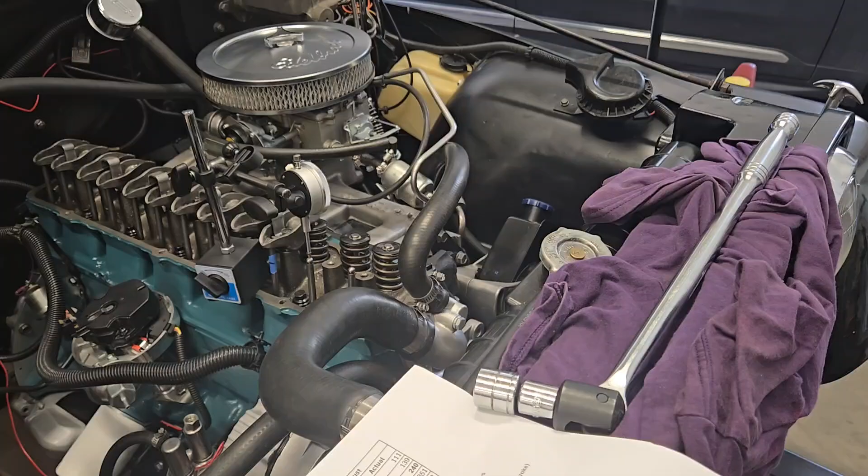So here's a quick overview of this setup that I have. I have my dial indicator on the intake push rod. I was talking about that. You could either measure it here. I find with the tip of the dial indicator being right at that push rod, I don't have to worry about the ratio of the rockers. Again, that's 1.6, so I can just measure it directly from the cam lobe. I just have a pretty simple setup there. That was pretty easy to do.

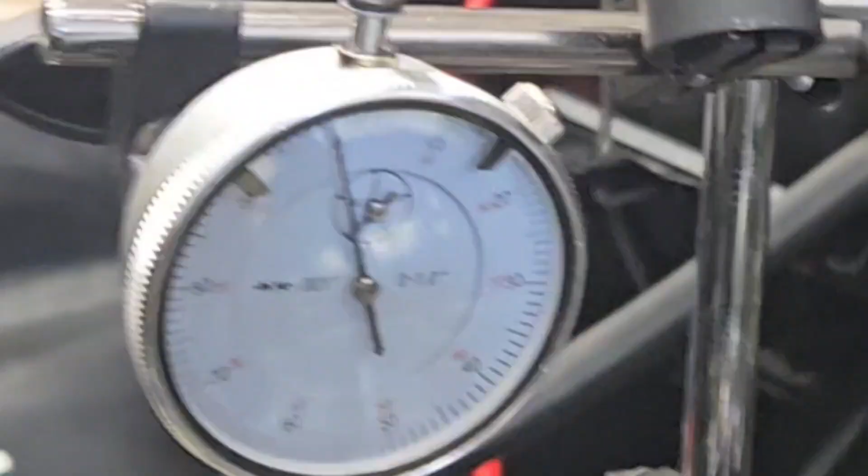Around here you can kind of see that I have it zeroed out. So that's the intake, and I'll do the exhaust next.

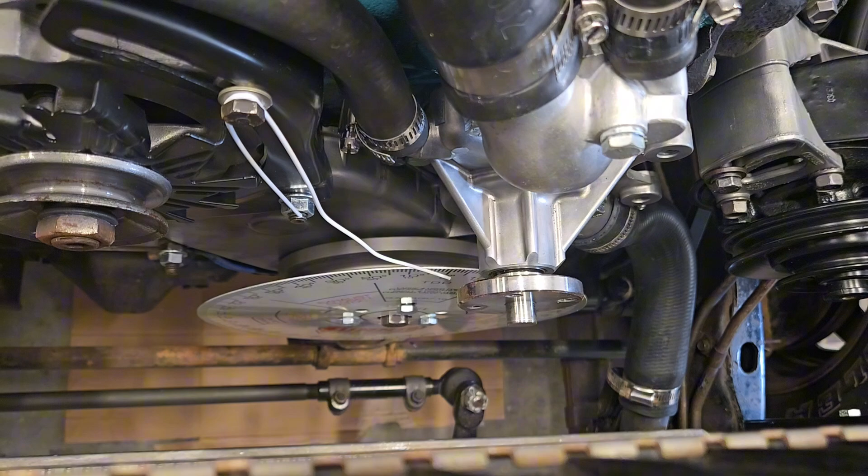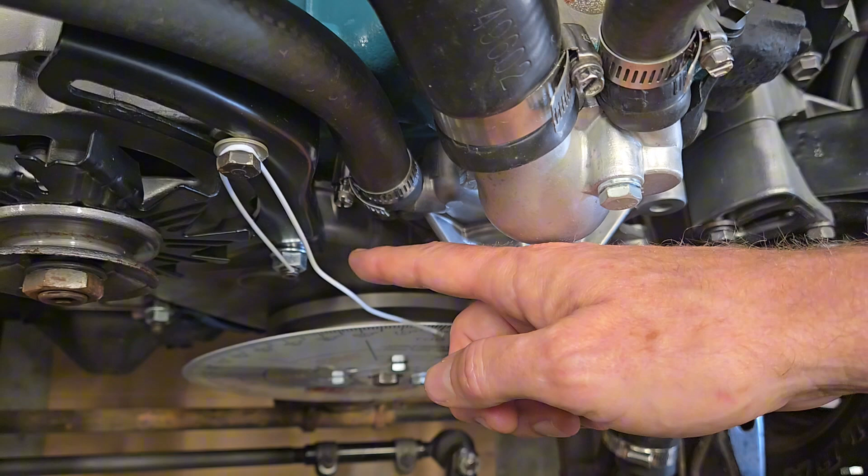Now here's the other part. I'm going to try to get as good an angle as I can. I put the Summit dial on there, again, there's probably lots of different dials you can buy, but I just bought this Summit one, I think it was like 23 bucks. It didn't come with a solid lifter and all that other stuff, it was just the dial. My hanger, and that's my pointer.

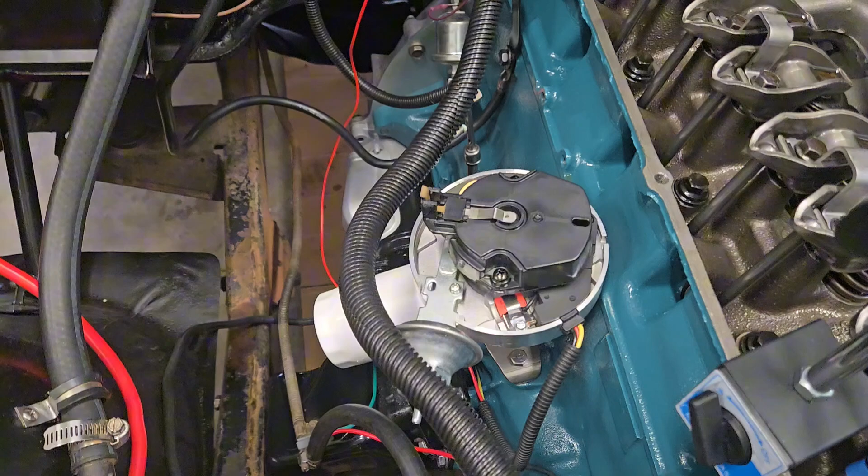I actually do have it at 0 right now, so I already put it at top dead center. And I know it's on the compression stroke because I also have my distributor cap off, and I know that's at the top of the compression stroke, between the compression and the power stroke.

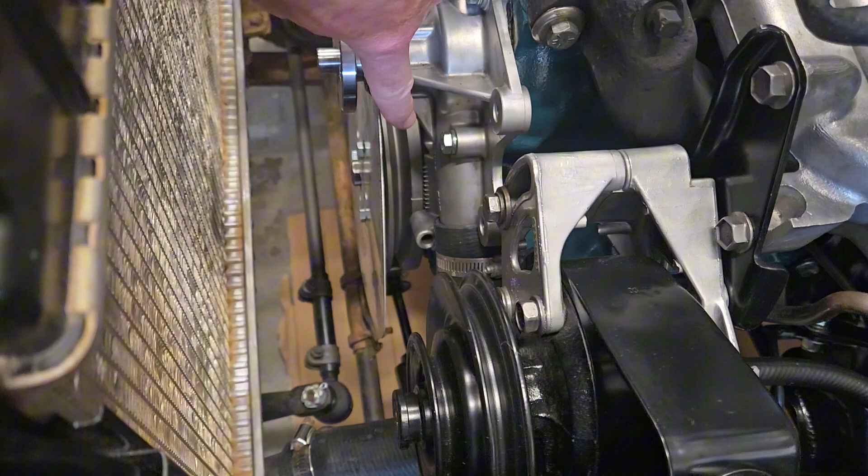So let me see if I can get a good shot of this. You can see my timing mark there. Right there, I'll try to get a little bit closer, but you can see the timing mark, and that actually is at 0, so I know this is at top dead center. I've already used a piston stop to confirm that my balancer is not spun and that it's right on there. It's the second mark, it just looks like it's off because it's off an angle.

But let me see if I can get a... So if you look at that right there, again, the correct angle would be about here, and that is right at that second mark. I can see it better from my position, but that is at 0. And so I put my marker.

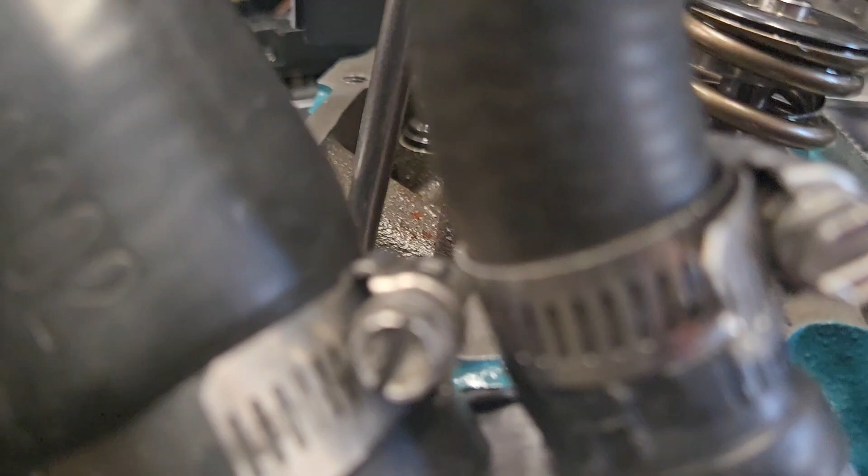Again, I just have a coat hanger right here. Again, it's a tight spot, but see, it's right at 0. So I just have that tip of it pointing right at 0.

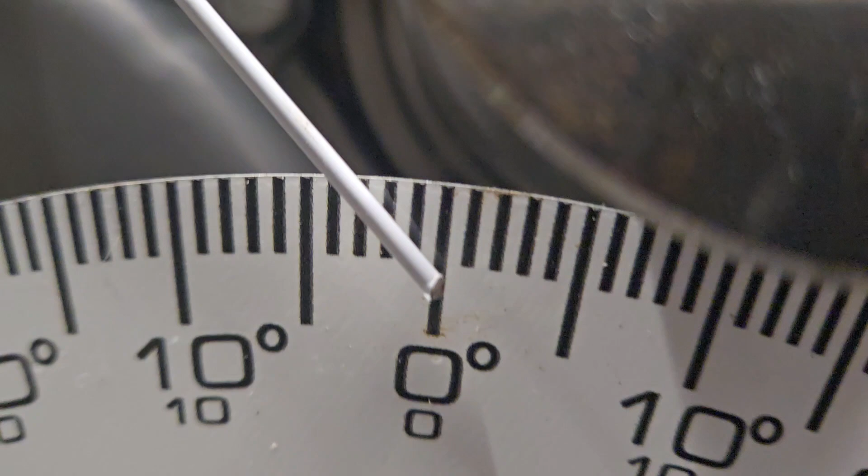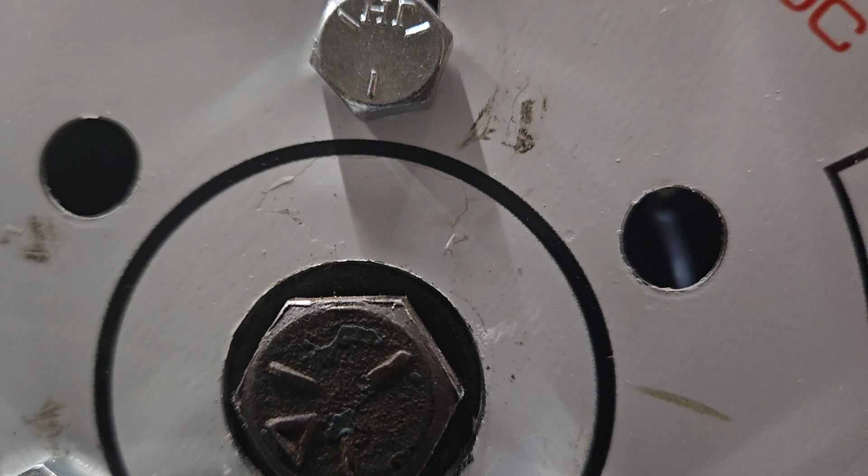And I'm going to show the bolts down here. Again, this is how I have the bolts. I just used the 3 bolts that the pulley connects into the harmonic balancer. There were already 3 holes in the timing wheel, so I'm just using those, and it fit right over there. It's centered nicely. And also a bonus from that is I did not have to pull out the main bolt for the crankshaft that holds on the harmonic balancer, because you do have to push that counterclockwise, and I didn't want it to...

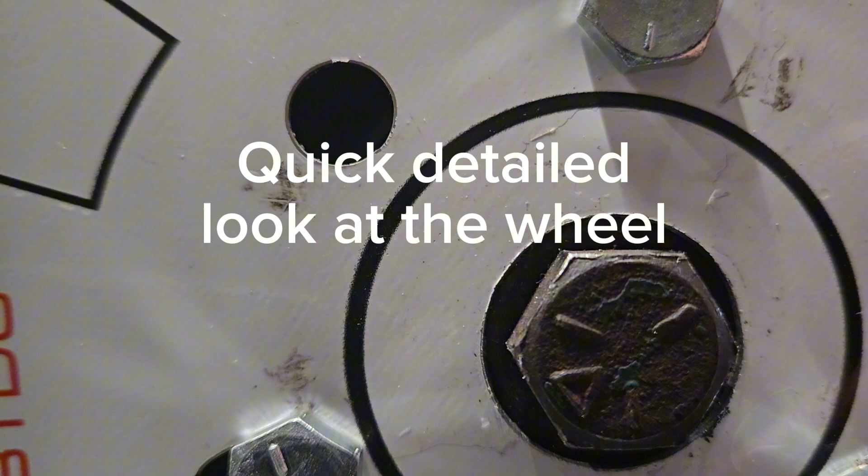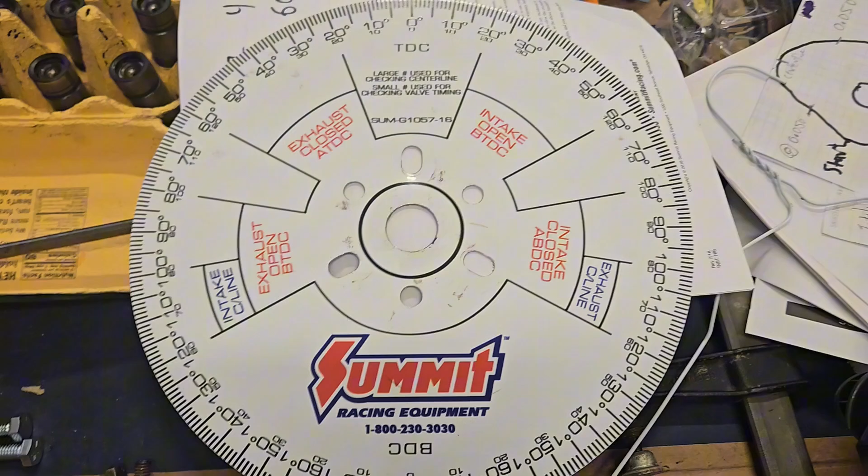Wanted to get a closer look at the Summit wheel because I had already installed it when I started the video. So there's the wheel. Again, I was just measuring the degrees around there. It's a little bit of a pain because it goes to only 180, and I was trying to measure both sides, but not too much math there. It does try to help you out with some of the intake and exhaust relative ranges.

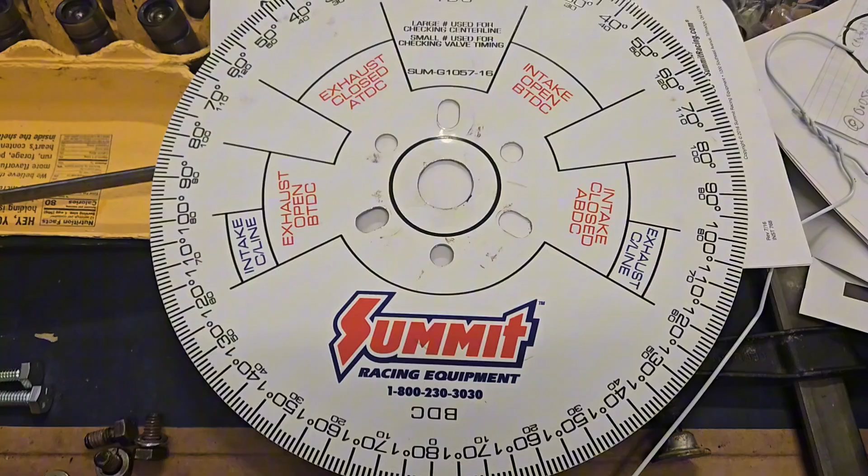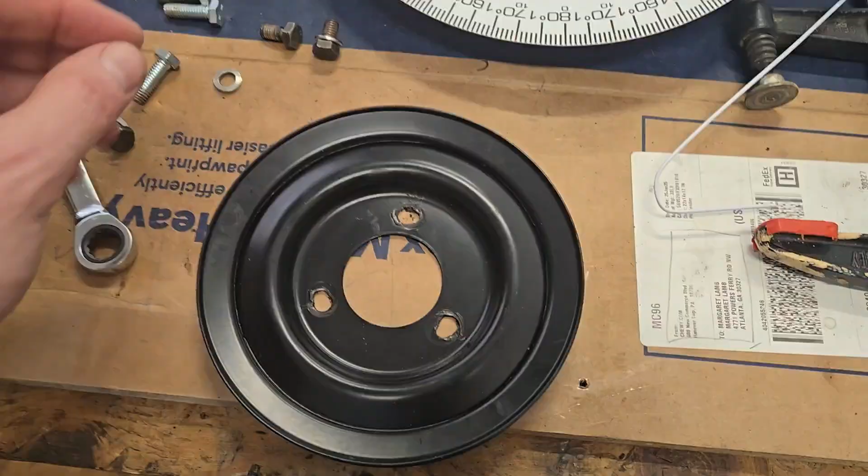So this is the pulley that goes over the harmonic balancer, and again, the bolt for the crankshaft goes right there. These bolts here hook the pulley to the balancer. I used just 1 inch because it's not a flat surface, our harmonic balancer is not a flat surface to connect to. Had to screw them in just the right amount to keep this relatively flat.

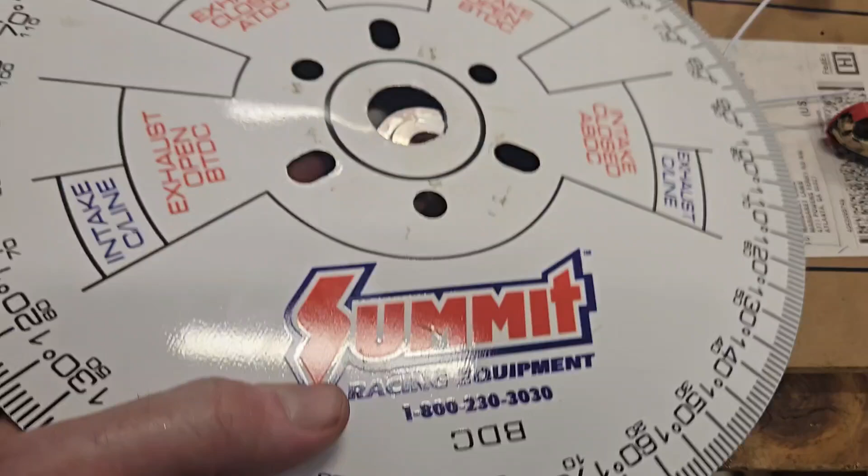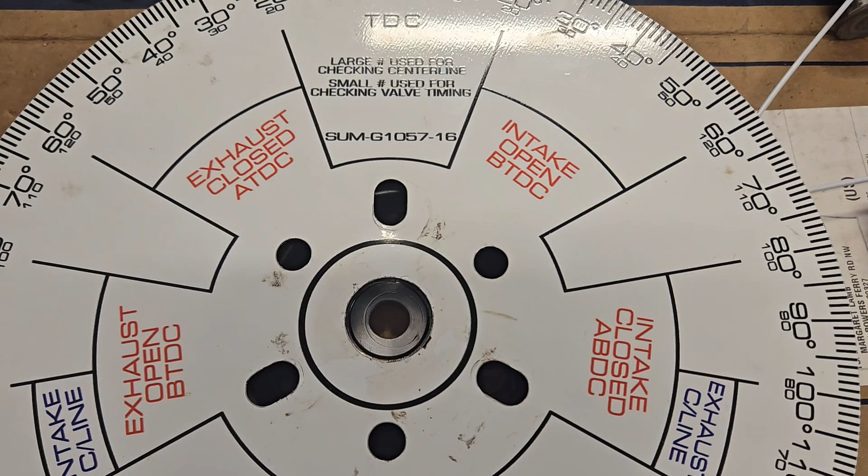So it actually does come with these inserts depending on the size of the bolt that goes into your crankshaft. So you can kind of see it goes like that, and that way you can put the crankshaft bolt over it. But again, I just thought this was much easier, because when that is over it, it sits a little bit proud and the wheel here would spin. And so anyway, this was just much easier. I didn't have to undo that bolt at all, I could have it torqued down, and it worked out pretty well.

And it just missed the water pump, so you don't have to take the water pump off, nothing else, just the front fan and the pulley, and you're good to go.

So from the vantage point up here, I can make out pretty well within a degree of where that tip is going to be. So I'll read out what I'm saying down there as I take a look at the dial gauge. You're just going to have to trust me on that one.

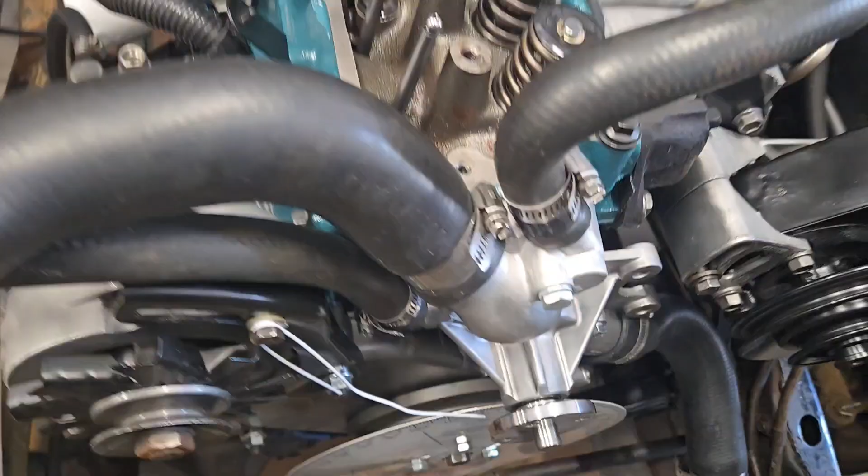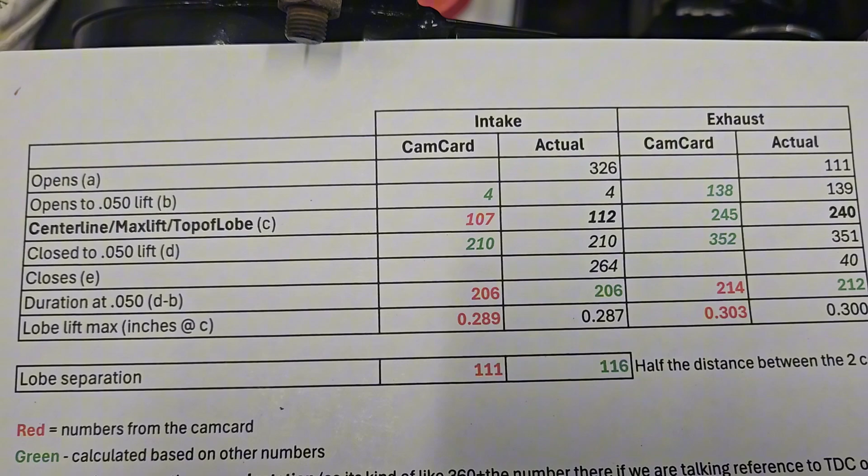Highly recommend taking out the spark plugs because it's much harder to turn with the spark plugs in there, because of the compression. Again, what I showed in part 1 was all these numbers here, and I need to confirm this 112. Again, I was pretty shoddy with it.

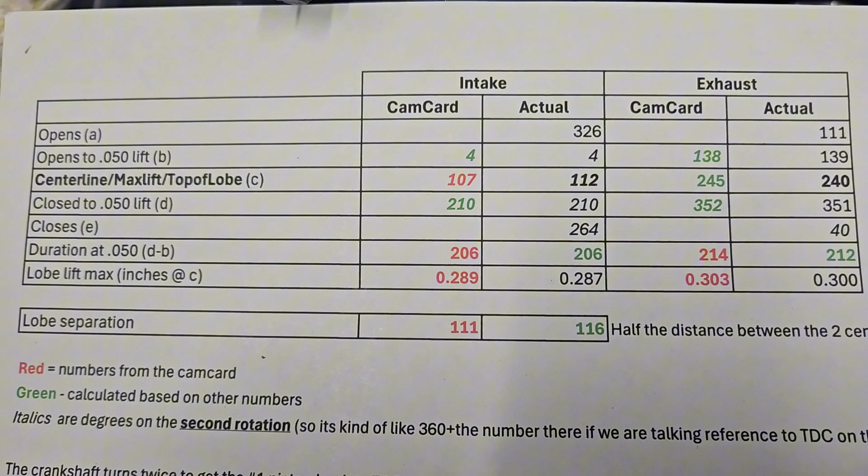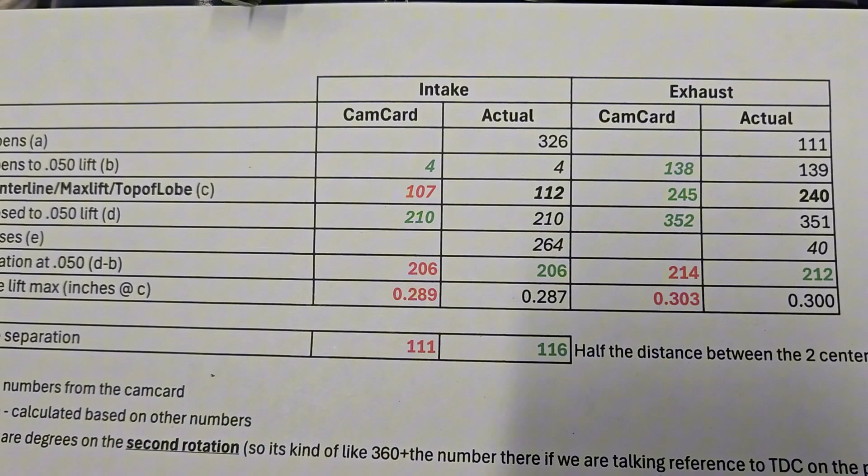I did the actual measurements for the intake and exhaust without even looking at the cam card. I just wanted to go through real quickly, and I was amazingly surprised at how close I got to what the cam card said. Again, in part 1, I go through all those numbers and where those come from. But I'm 5 degrees off here.

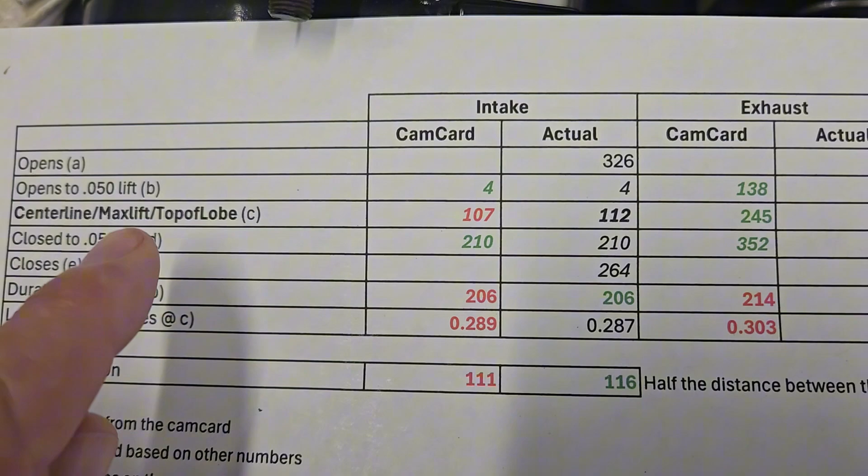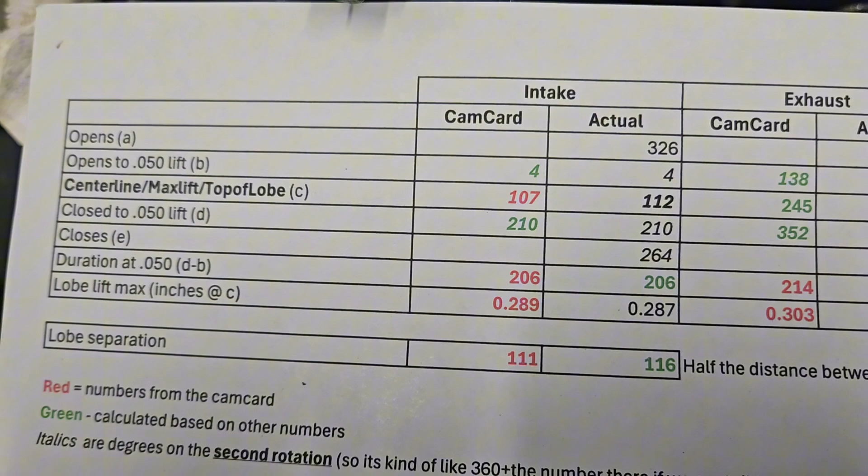My guess is that top of the lobe, that's the intake center line, is supposed to be 107. I got 112. It's flat there, almost flat for a little bit, and you'll see it. I'm going to move it back and forth and try to be a little more precise with the dial indicator. I just saw it, it kind of stopped going up.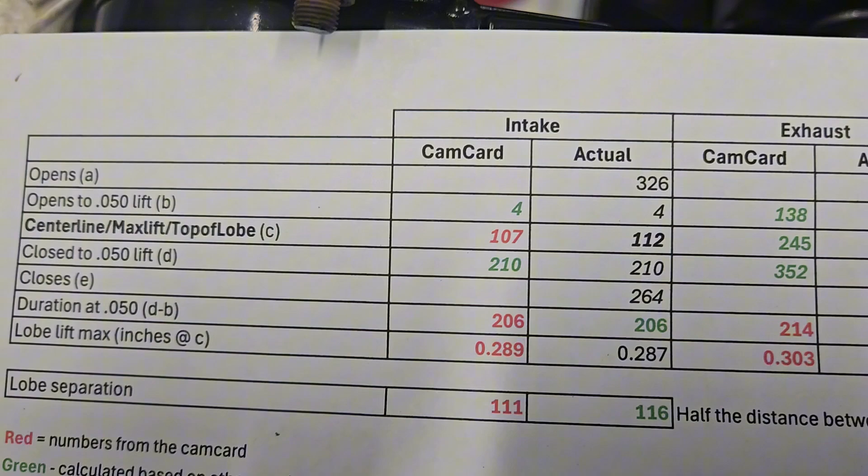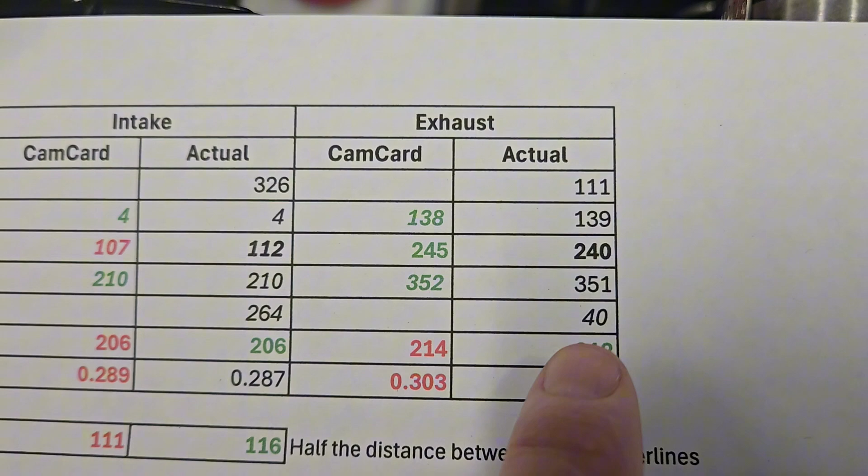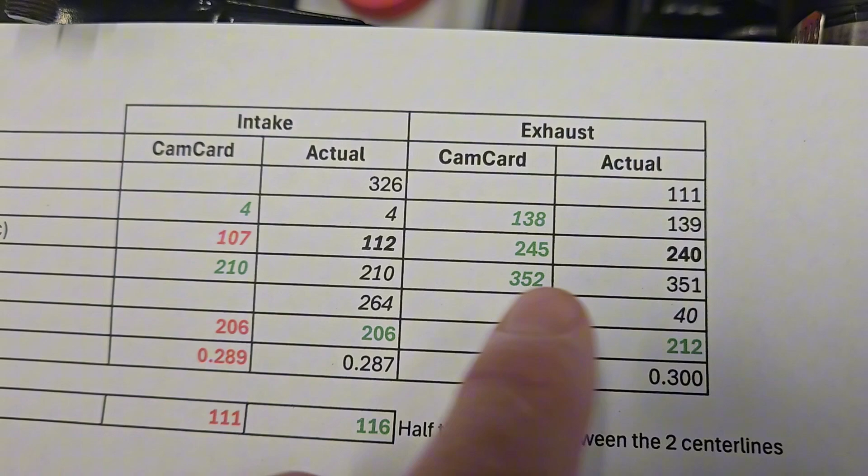It started going down, so I just measured the degrees at that point. My guess is it actually is 107, and I just need to confirm that, because that 4 and that 210 that I measured independently were spot on. So I think the 112 is just off. And then the same here, 139 within 1 degree, 351 within 1 degree. I think that 240 was just a little slop on my part. So I'm going to reconfirm that it's actually closer to 245. I mean, everything is close enough that I know the camshaft was ground pretty darn closely to the camshaft specs. And that's really what we're trying to do here.

So hopefully that's a pretty good angle. You can see I already got it zeroed out. I have it at top dead center, so I know that the exhaust and the intake valves are closed, or I'm off the lobe. So I know that for a fact. And I'm at 0 on the dial. So I'm going to go ahead and turn this.

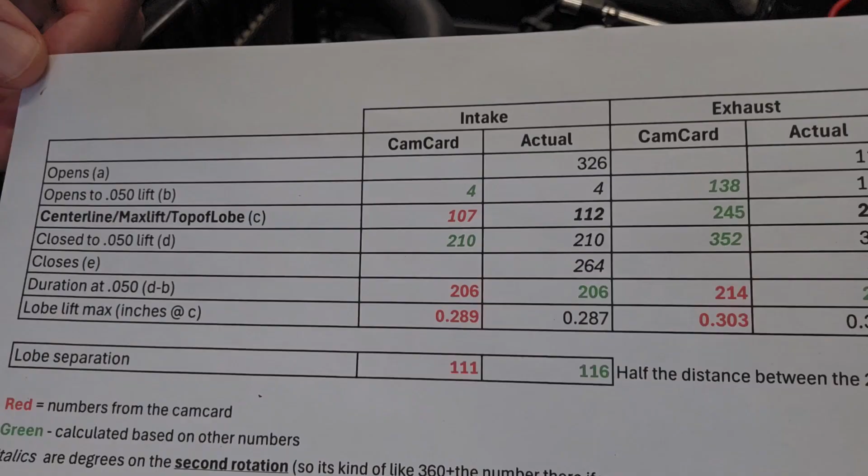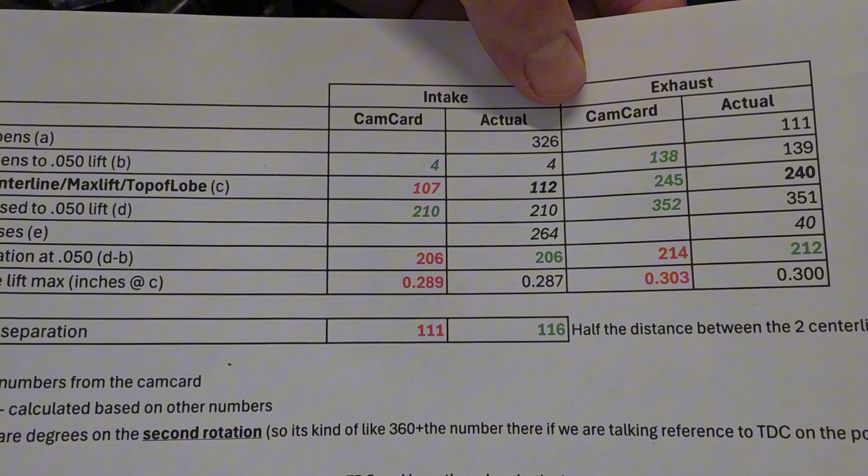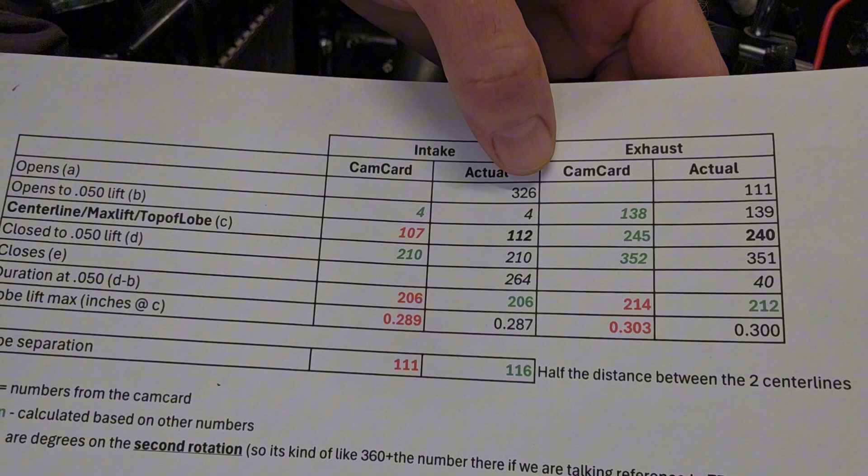Now in the intake, the 107 is at the top, and that's what I'm trying to confirm. Again, this is a full rotation all the way around, so I'm going to spin it a whole 360 degrees, and actually I should start seeing it open at 326. So that's not given by the cam card, but I know from my previous measurements that it starts to open at 326, and then at a full revolution plus 4 degrees, I'm going to be at 50 thousandths of lift, and then I'll go to that max part.

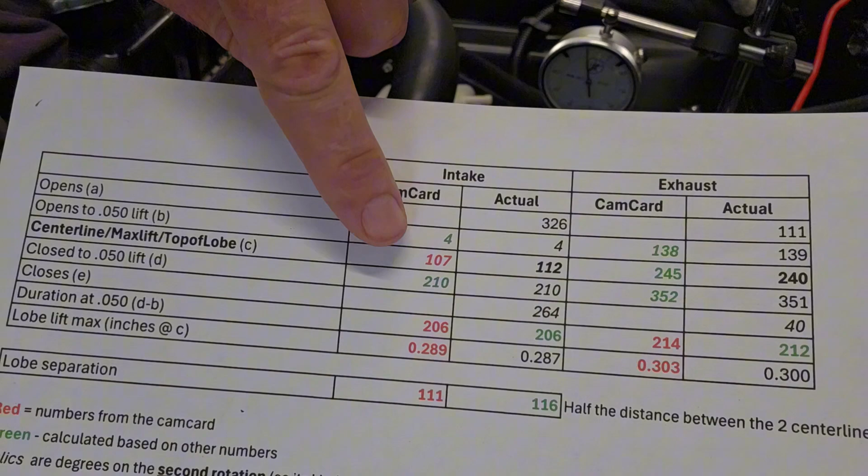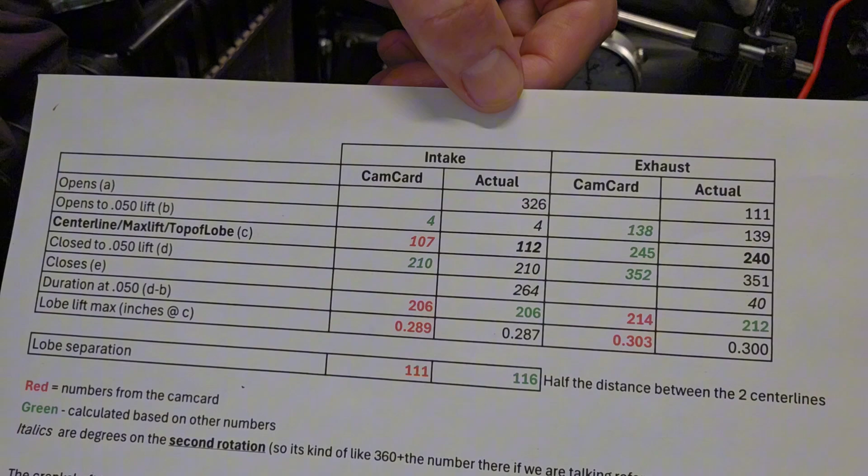Once I get to 100 degrees or there, I'll slow down quite a bit and really try to dial that in and just make sure that it's 107 and not 112. I'm pretty sure it is, but I'm just going to use this for illustration purposes. So we're going to go to 326 degrees to see the intake start to move. It's whenever this thing starts to move, when the dial starts to move up, that is at 326.

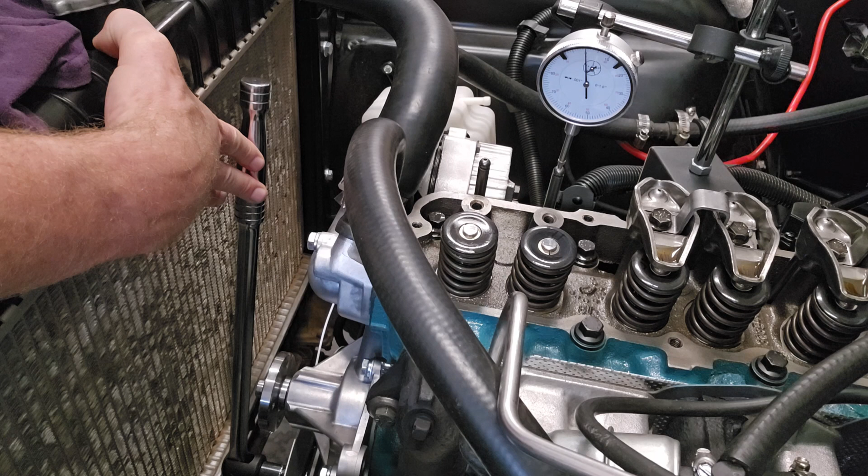I'm seeing it starting to move there. All right, where are we? Just to confirm that 326. So I think I went past it. Again, I kind of get why they do the measurements at 50 thousandths, because exactly where it starts, just from the grinding, I can see there's probably a lot more inaccuracy with that number, because it's really hard to see if that needle has even moved.

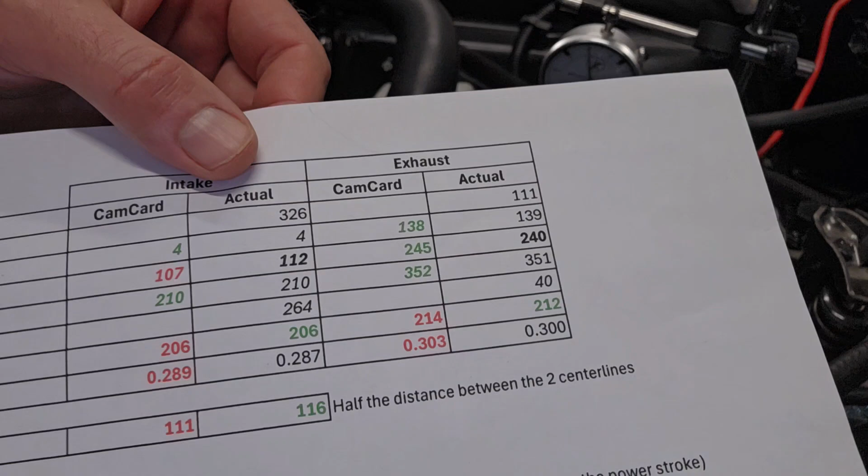I'm in the neighborhood of that 326 that I had measured before, so I'm just going to leave that as is. Again, that doesn't play as much into it. Okay, so I'm going to keep turning. So that 326, again, I'm going to do a quick look at this. That 326, I was almost a full rotation around, that's what I was measuring.

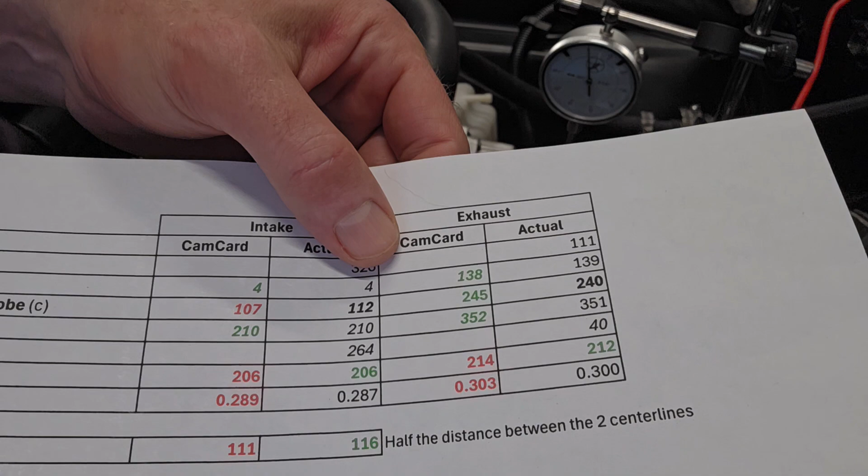Now I know that once I go past 0, I'm going to go about 4 degrees past, and that should be right at 50 thousandths lift. So that's what we're going to take a look at here. We're going to see the dial indicator going up. We're looking for the exact degrees at 50. I'm just slowly turning.

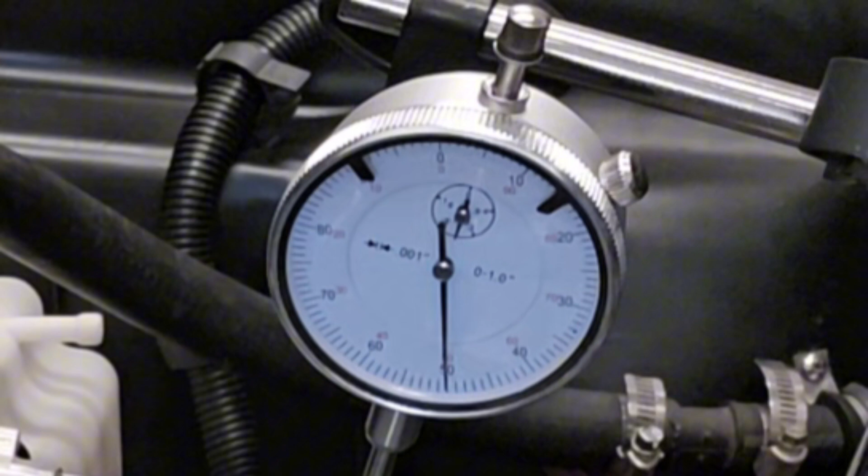Right, that's spot on at 50, and I'm at 4 degrees. So that 4 number is correct. And I had mentioned this before, that 4 degrees is spot on from the cam card. So I know that I am dot to dot. So just going through that first step at 50 thousandths using the cam card or whatever is stock for your engine, you can make sure that your cam has not skipped a tooth.

So that's one way to do that without having to take off your timing cover. Again, that's a big mess. So that is a way to confirm that you have not skipped a tooth. Of course, if you have a really loose timing chain, it may be off some, but I wouldn't think it'd be off as much as a skipped tooth if it's just a little loose.

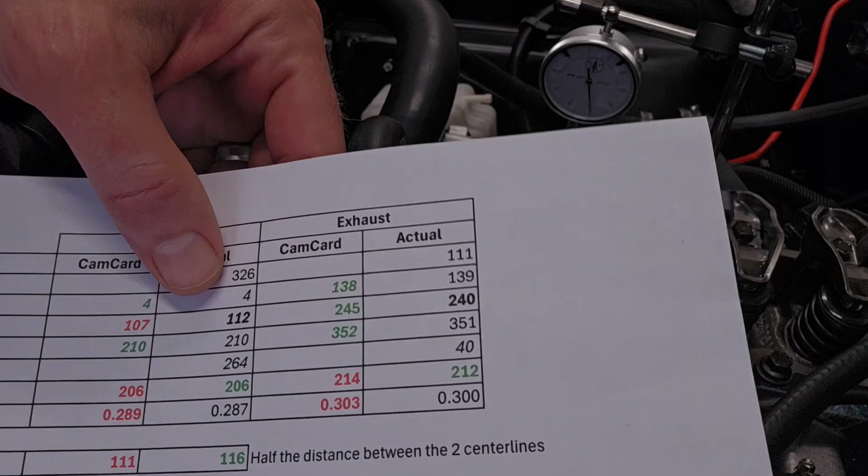All right, so that's 50 thousandths, and really what we're trying to confirm is that 107 mark. So I'm going to go another 103 degrees. We're going to see what happens here. We're going to try to get that perfect center line, top of the lobe.

And we'll be hitting that at about 287 thousandths of an inch, where the top of the lobe is. So we can take a look at the gauge here and kind of follow that around. Right now it's at 50, 100, 200, 270. I know that 289 is what it is.

So we're going to take a look at that and see, is it still going up? Yeah, it's hard to measure. Okay, it's still going up. We're at 280 almost. Still going up, still going up. We should start seeing it slow down here pretty soon.

All right, I've stopped turning it. What are we at? 285, 285 and a half. Still going up, still going up. All right, I've stopped. Let's see. 287. 287 and change.

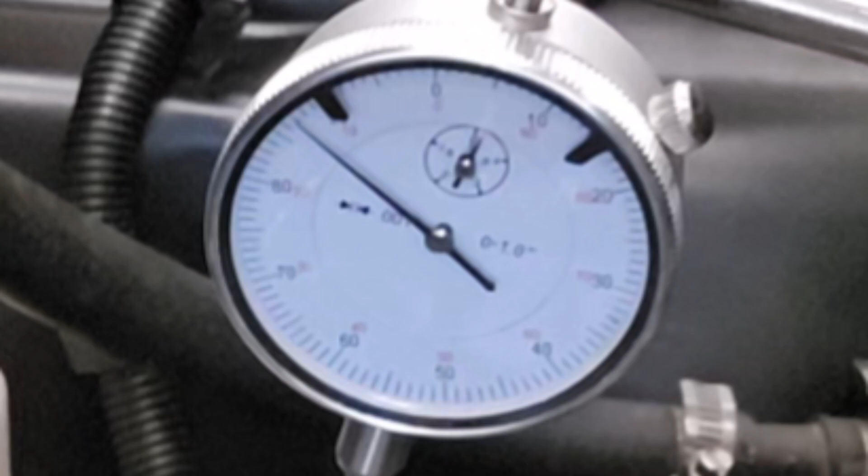So if you are doing this, that center line, you basically need to find where it stops going up and where it starts going down. That'll be about a 10 degree difference. In the middle of that will be the actual center line. So that is good to know.

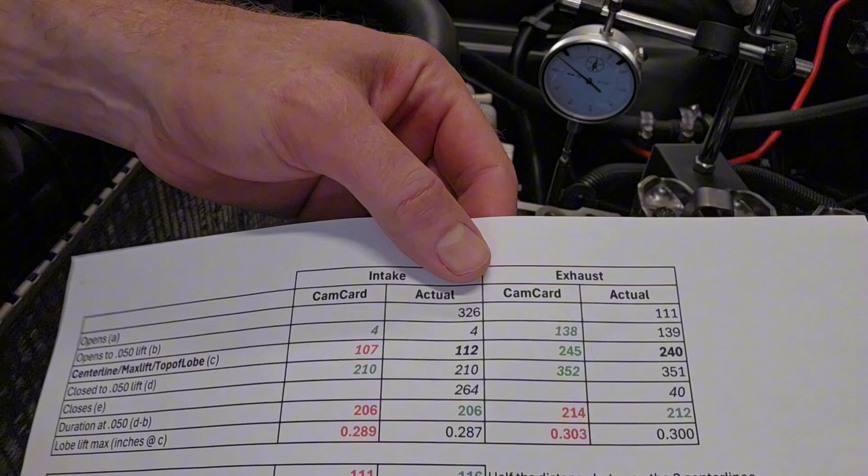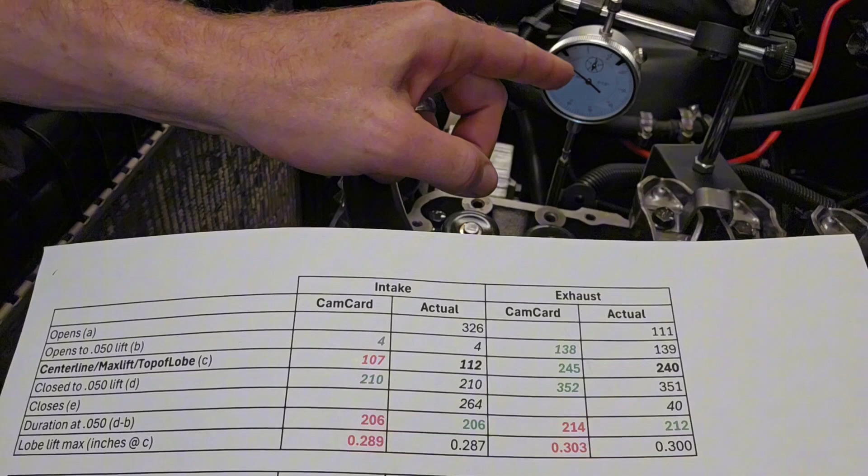So apparently when I did this before, I put the 112 when it started going back down, so I was 5 degrees past. I just measured it, and I got a range from 103 to 112 where it's basically flat at maximum lift. So hopefully that's helpful, and that's a little bit of relief that that 112 is actually 107. So that cam card is spot on.

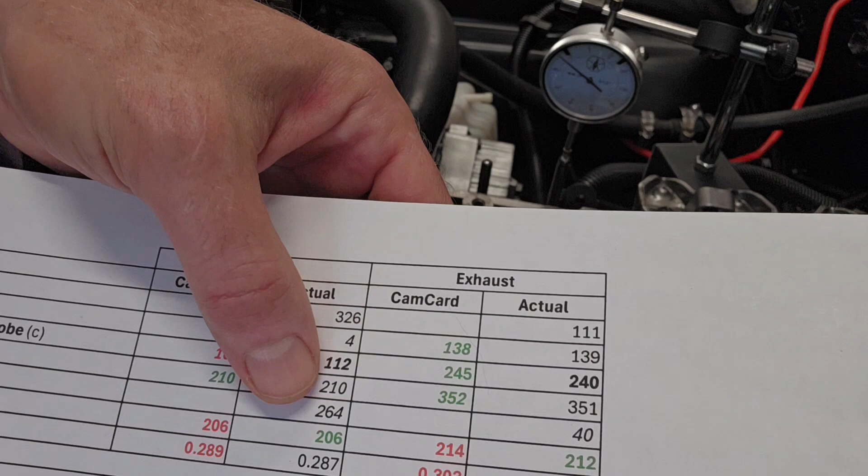Now, just for fun, we're going to go back on the back side of it, and that 210, I'm just going to confirm that again. The 4 was good, so I'm pretty darn sure that the 210 is going to be correct. So we're going to go back to 50 thousandths, and I'm going to keep rotating around until I hit that.

I should start seeing it come back down. Yep. 200. 100. Remember, we're going back down to 50, and we're going to measure that, and that should be 210 degrees.

A little past it. Oh, this thing's hard to get exactly right. There, all right, that's exactly 50 thousandths. I should be reading 210. Okay, looking at the camera, I am right at 209, 209 and a half.

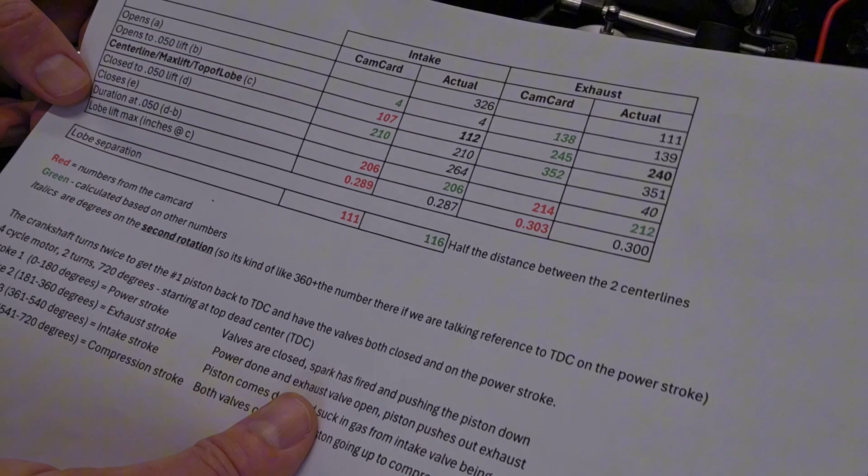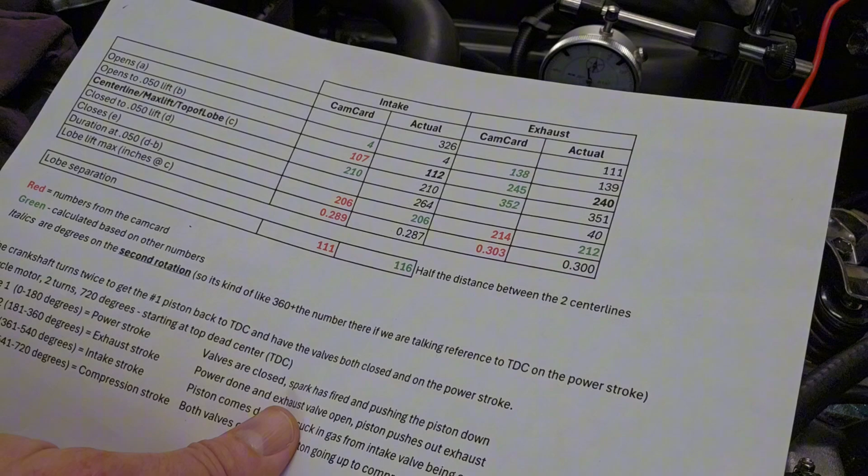And I'm right at 50 thousandths, right down here. And then again, I went ahead and measured before it closes at, again, that's not that relevant, but that 264, so another 54 degrees, and it should be closed at that point. Just for fun, I'm going to go ahead and measure that 264.

So I'm just going to spin it around until the dial indicator equals 0. Again, this is on the second rotation around. There's 720 total degrees.

Again, I moved that around quite a bit. It is really hard to get the starting point. The 50 thousandths was pretty easy to read, there was even movement along there. So again, I think that's much easier.

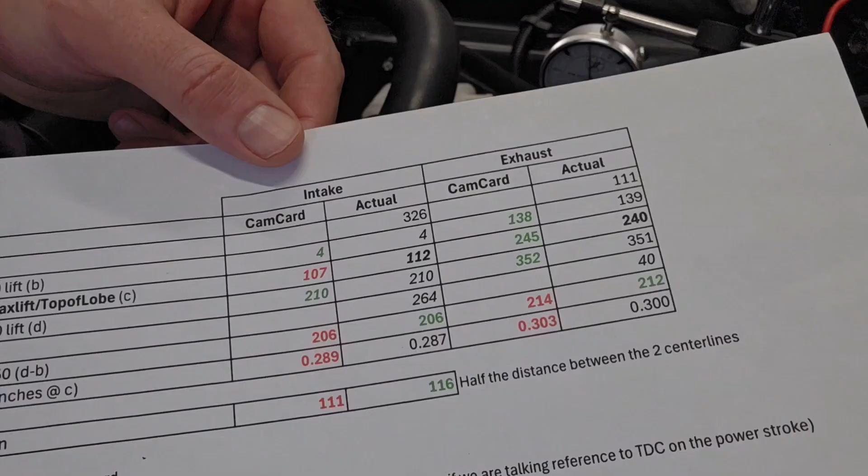I'm right now at about 265, 266. Again, this thing was kind of hard, there's a lot of play in there on the degrees. But that all checks out. So all my actual numbers are pretty spot on with the cam card.

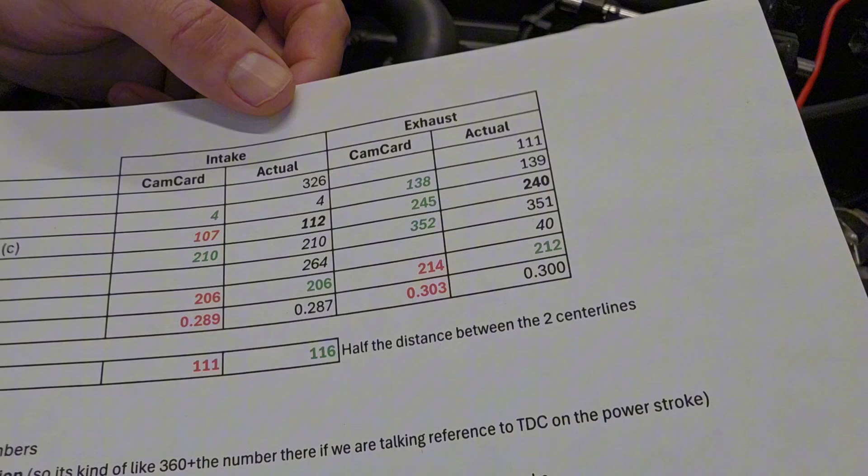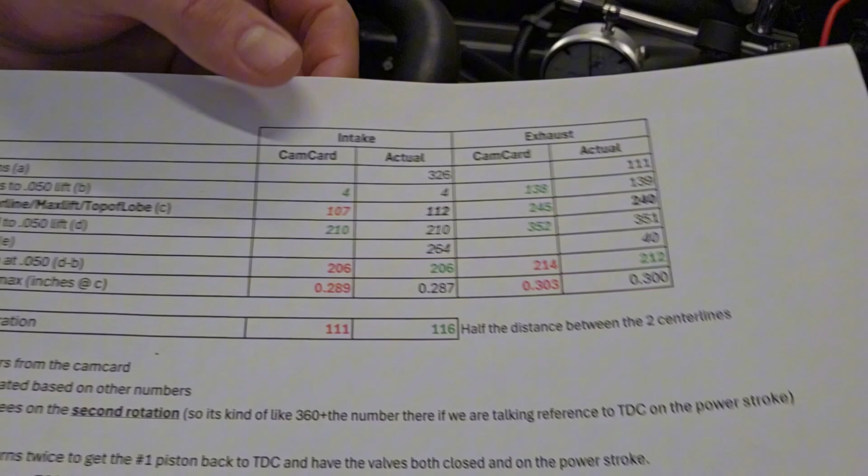I'm going to go ahead, and I know this isn't the most exciting thing in the world, so I'm going to go ahead and do the exhaust, set up the exhaust, and do a little faster run through of the exhaust numbers, but I imagine I'm going to find the same thing. That 111, 139, 240, 351, that's all on the first rotation, so I'm actually going to go back to top dead center on stroke number 1 on the top of the power stroke.

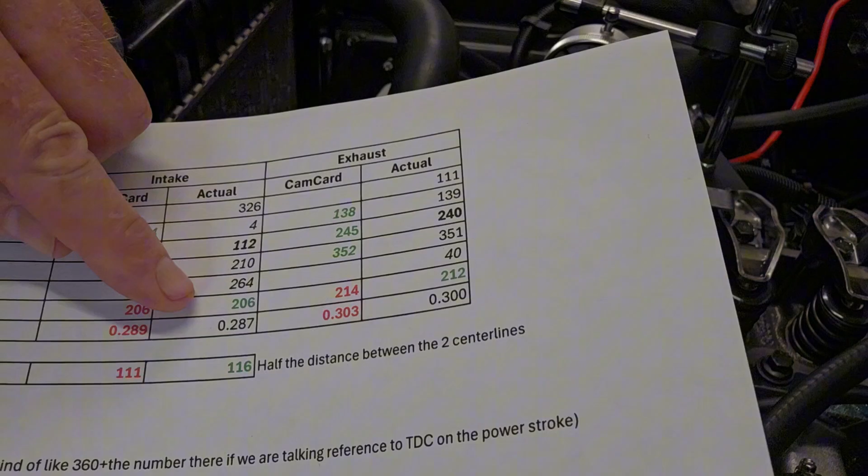And I'm going to go from there. The intake, those are all in the second rotation. So how are we looking here? I'm going to reset it to 0.

Oh, that's pretty darn close. I'm trying to make sure the push rod is lined up exactly with the dial indicator. A couple thousandths off, I'm not too worried about it, because so far it's been pretty accurate. I was wondering when I first started this how accurate it could be with variations in how the push rod is oriented, the angle, where I put the dial indicator, but this thing is reassuring - all the numbers are spot on.

So again, we're going to start off and go to 111 degrees, and that should be about when we start to see the dial indicator move. Alright, the dial indicator just started moving. I'm right at about 111. Again, this is when it starts to open, and that matches what I had measured before - less important than the 50 thousandths number, so we're going to move it to 50 now as the next point.

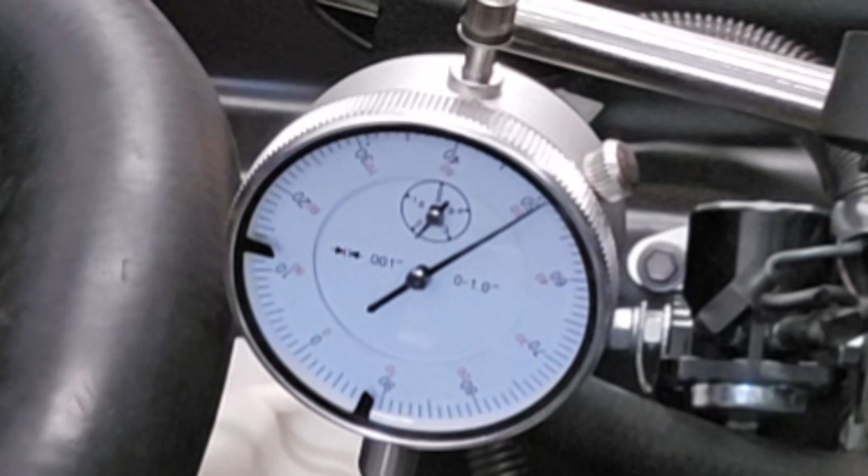20, 30, 40, 50. We're at 139 degrees, 138 and a half, 139. Spot on again. All right, let's move to the top, and that's going to be right at 303.

So we're going to move to get to 303 on the dial. 100, 200. And we're going to wait till it gets to the highest point. All right, it started going down now. That's interesting - it was actually a little, let's move it back a little bit.

That's 297. That's actually a little less than I had before, and it's supposed to be on the cam card 303. But let's jimmy that back and forth a little bit, see if we can't find that top. The play here is a little less than it was on the intake, like 10 degrees. I don't think that's right, I'm just moving it back and forth a little. So that's right about in between that top spot.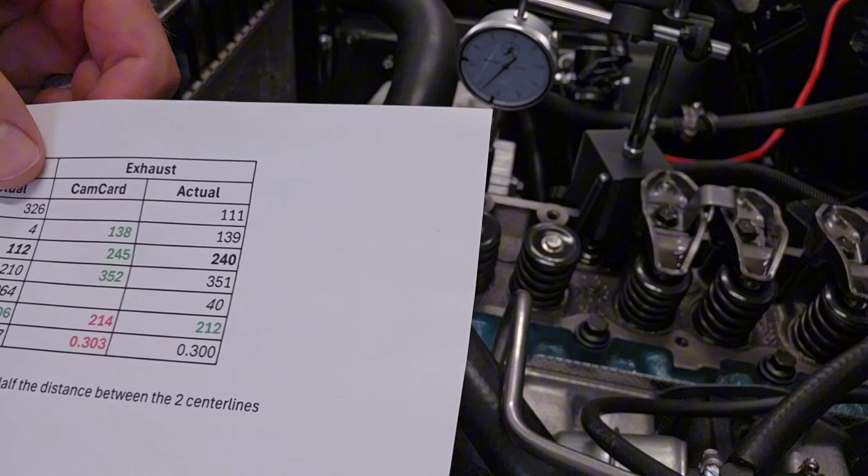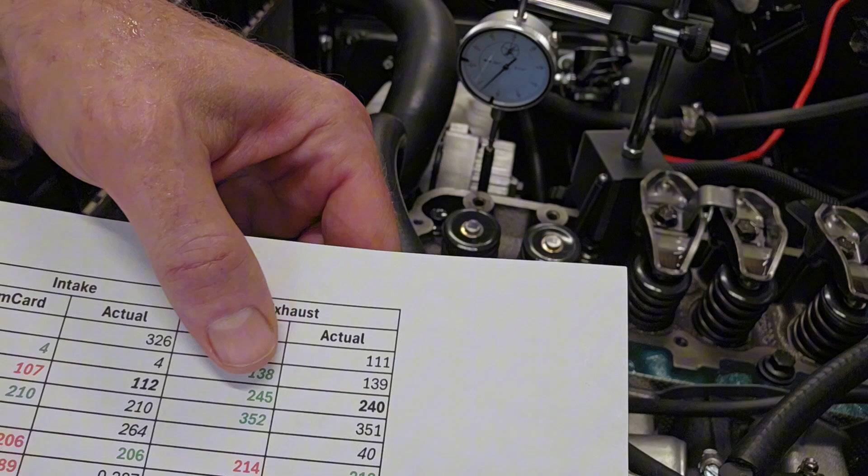Right now, without even trying, we're at about 244. And yep, I think that was - take a look, 245. I had done 240 before, but that was a little bit sloppy, I just did it real quickly. I'm a little more dialed in right now, and I'm at 244, so we're going to call that 245. So that exhaust centerline, max lift, top of the lobe, is at 245 degrees.

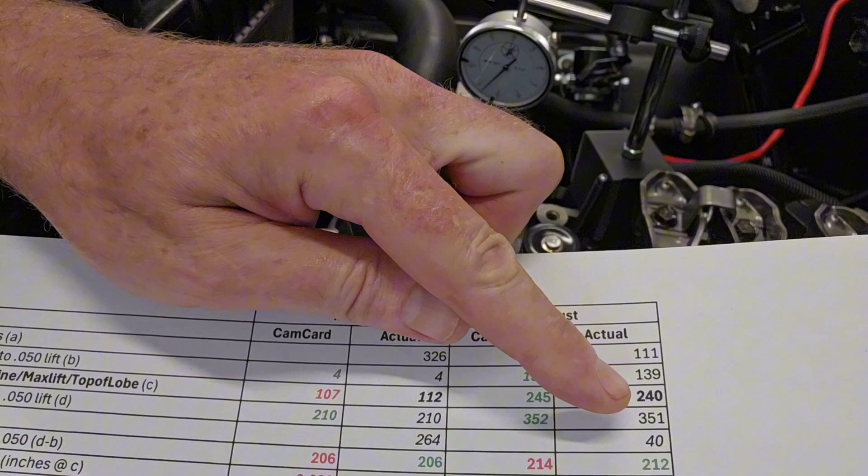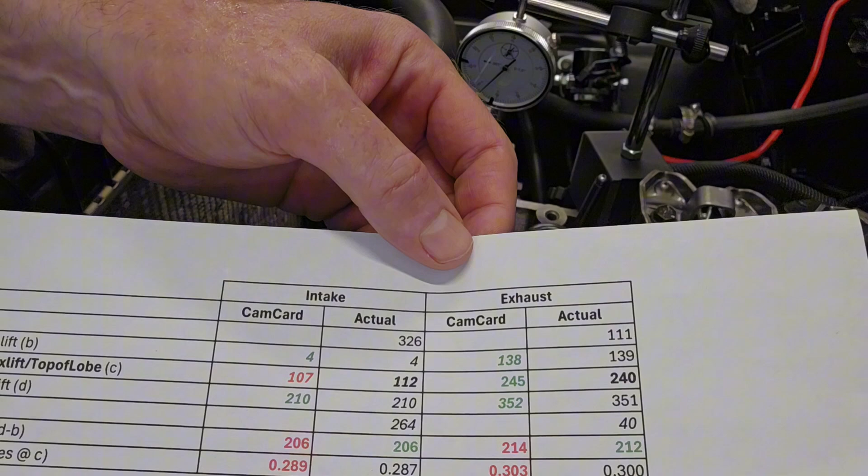So I can update that number there. I'm right in there - second time measurement around, I got a little bit closer to that 245. So I think we are good there.

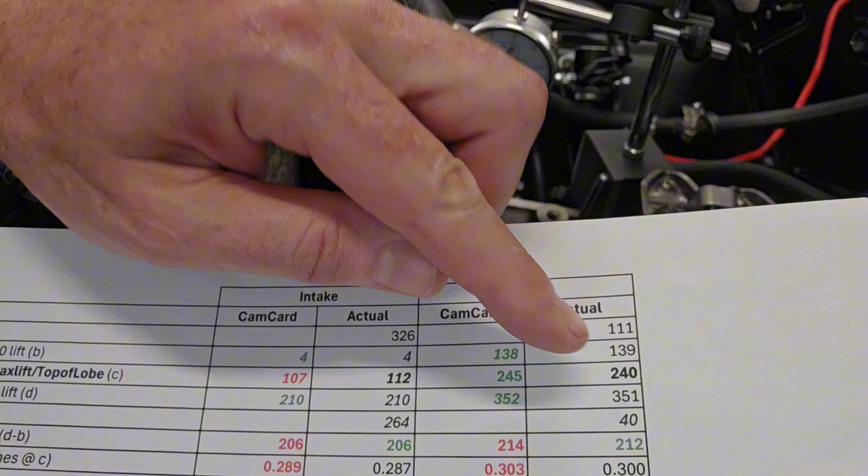Again, just for fun, we're going to measure the 50 thousandths closing at 351. So this one here, the 351, 352, and then down to 40 when it totally closes. All right, so we're going to keep rotating around, it's going to go back down. That's 200, 100, and we're going to get down to - oh, I went past it - 50.

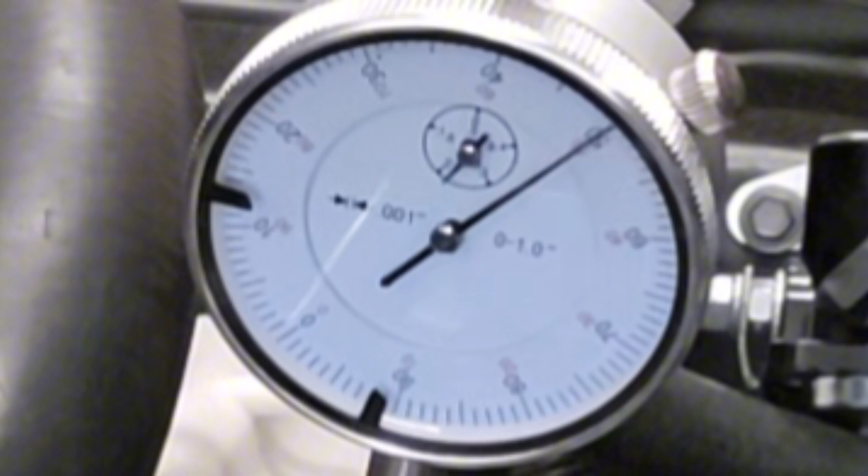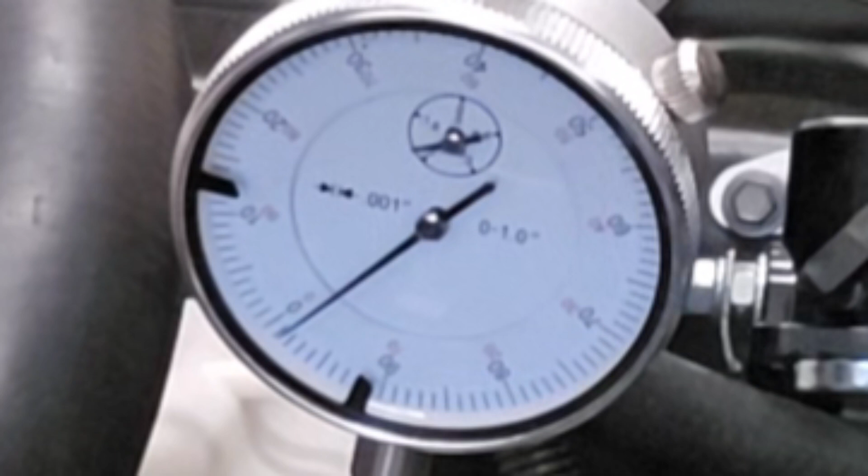All right, pretty close, reasonably close. And I'm at 350. And that is right there, spot on, within a degree. All right, now we should start to see it close when we get 40 past into the second rotation. Yeah, in fact it's before that - I'm not even at 40 yet, and it stopped moving.

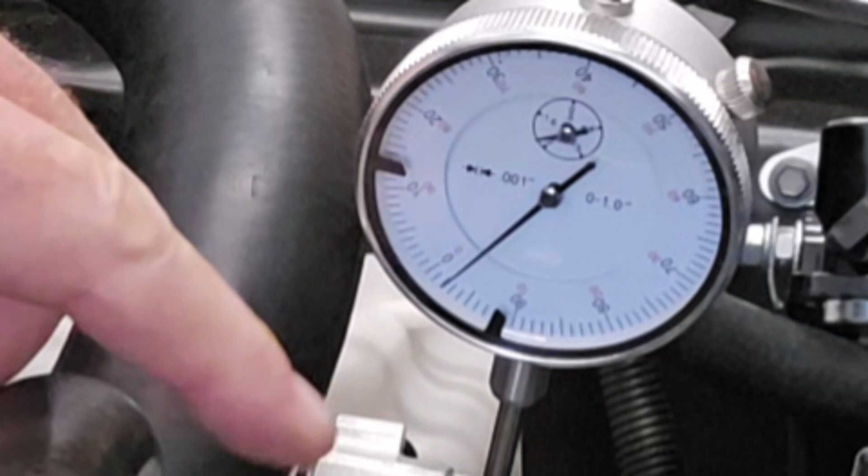Yeah, it's in the 41, 42, 43 range, somewhere in there. Again, exactly when it closes is not that big a deal. My dial indicator must have gotten off a little bit, because it's reading past 0. Again, some little shifting here and there - it just goes to show you some of the variations, and I didn't really move anything here.

So when I said it wasn't quite up to 3, it was about 298 thousandths on the lift. This probably accounts for it, so I was probably right at 300. Again, the cam card says 303 - I was at 300.

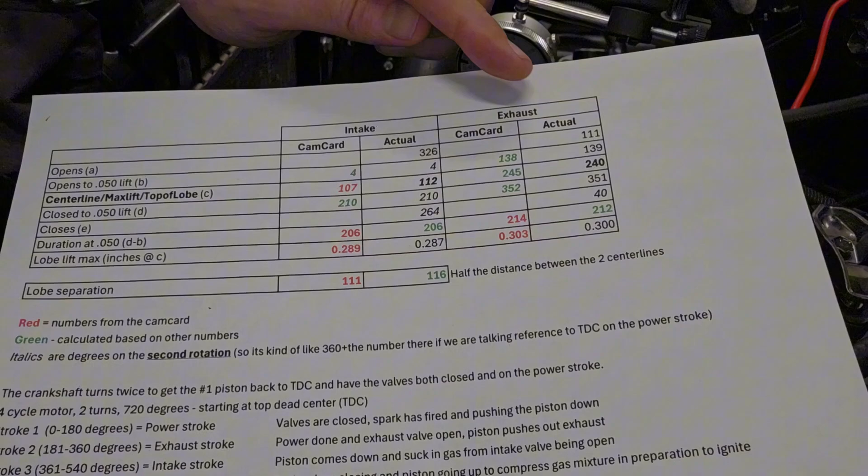So that's it, that's all the markings. Again, go back to episode 1 if you want a walk through of the measurements here - these are what I actually got and what the cam card told me for each of the intake and exhaust. It's pretty simple, I just rotate it around. Again, I prefer measuring each of the 5 points when it starts to open.

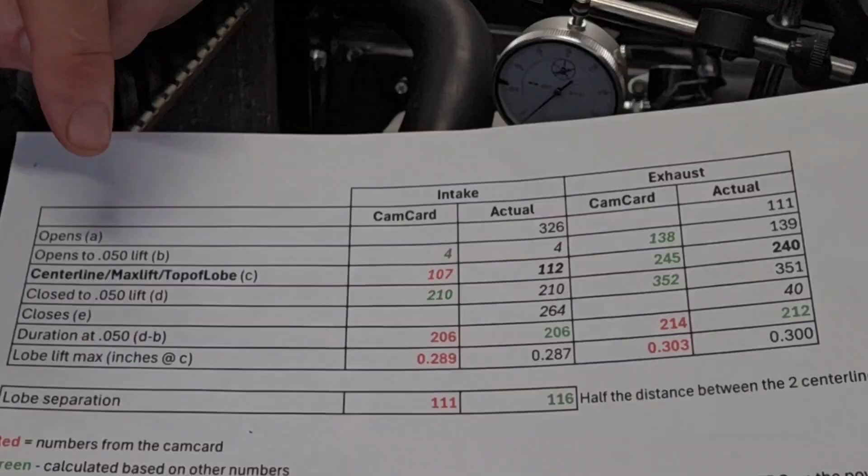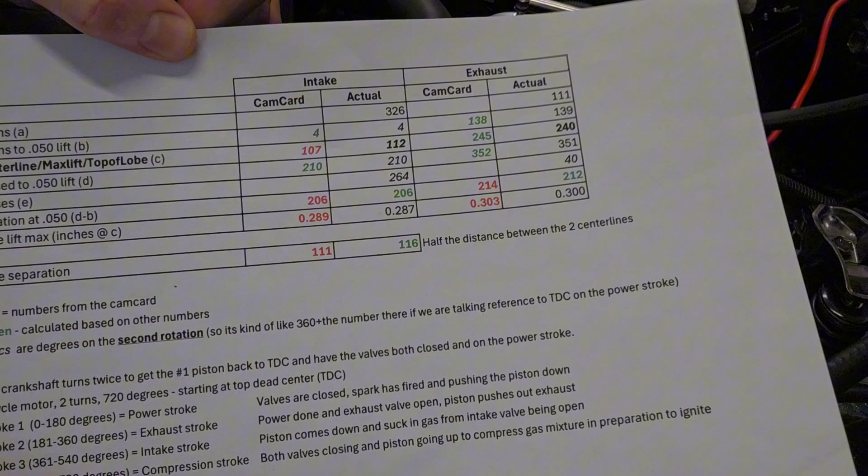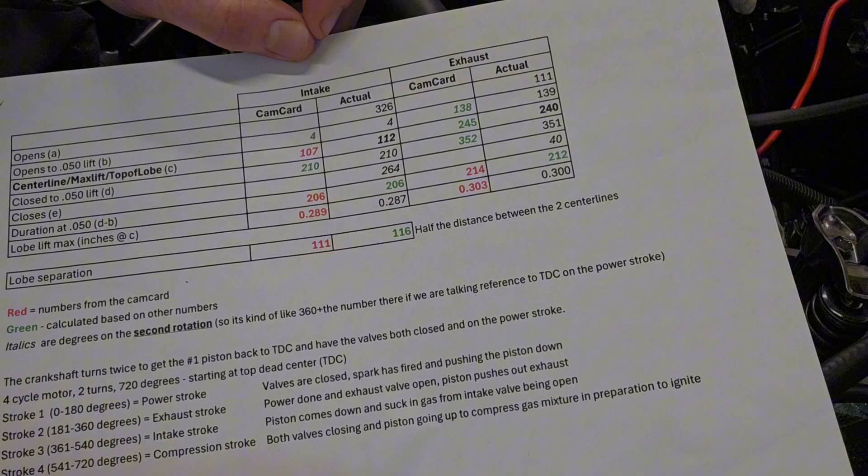Opens to 50, max centerline, closes to 50, completely closed - just following that whole logical movement across the lobe, so I can better understand what's going on here. If you're a professional, obviously you don't need to do that - this stuff is second nature, you're just reading the numbers, you know where to go. I did all this because I really wanted to better understand the travel along the lobe and how the intake and exhaust interacted against the strokes, and I think I have a much better feel for how the whole thing works out.

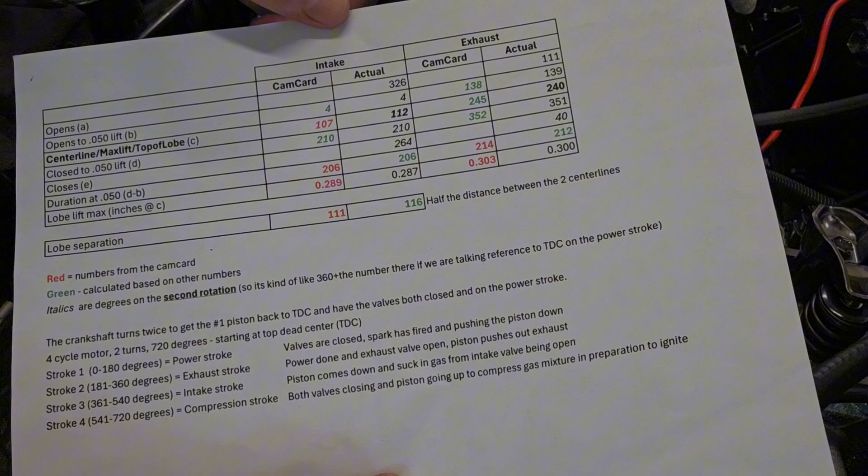And again, you can do it with the engine in. The Summit wheel - I'd recommend it, but I'm sure there are other ones you could use. And that's about it.